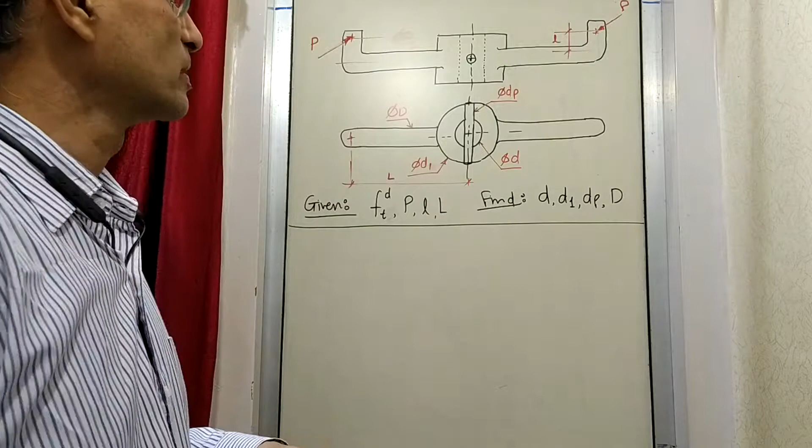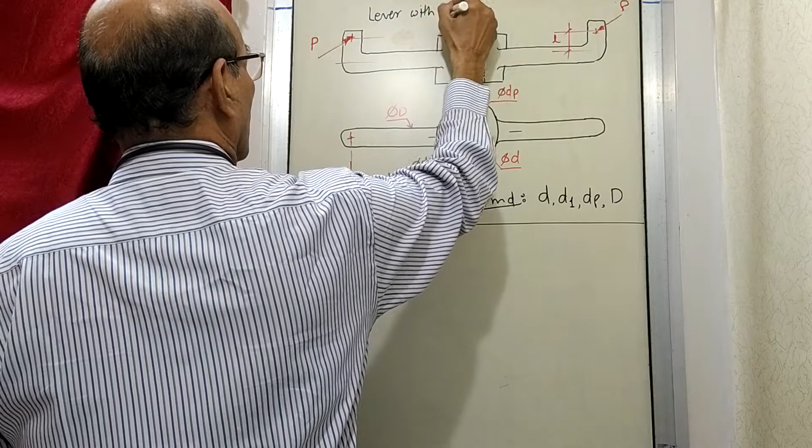Okay, so this is the exercise, this is a kind of lever having combined stresses. Maybe I'll add here: lever with combined bending and torsion. So the combination here is bending and torsion.

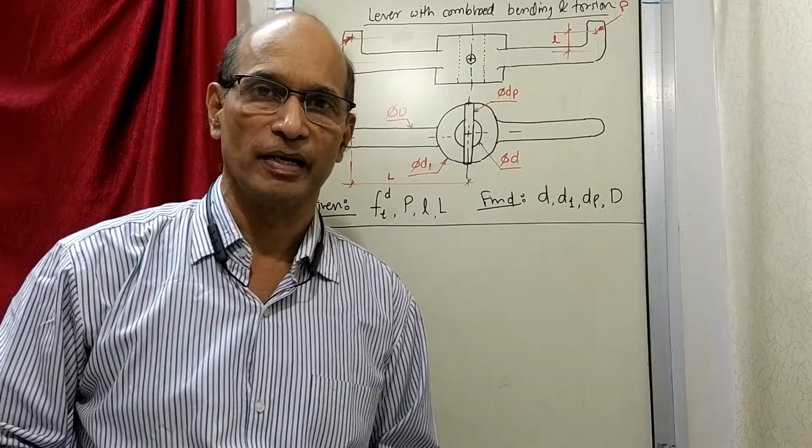Now let us first see how this drawing is made. There is a lever like this, one view like this, the other view is like this. And here what you see is, maybe I'll draw it slightly different here, just to be more accurate.

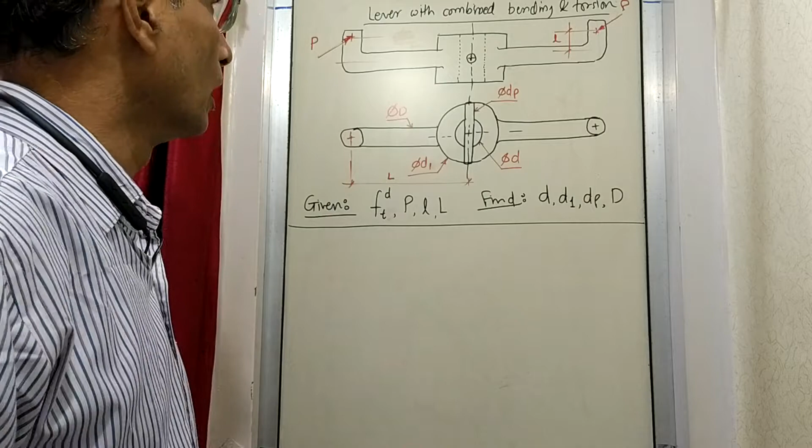Now what is done here is, the load that is applied is in such a way that if you see here, maybe I'll show it again like this, the same load here in the other view.

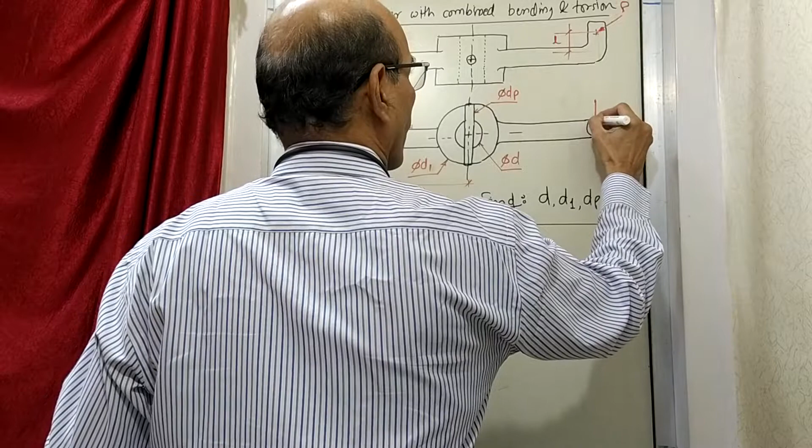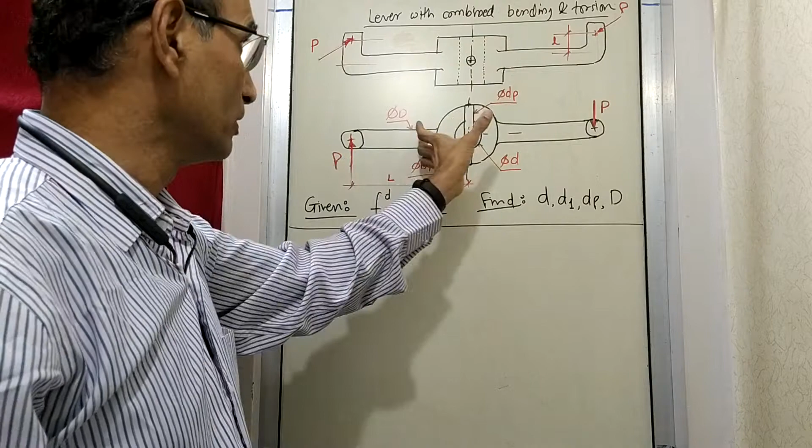So what it means is, this P is applied like this, and as a result we are going to rotate this handle, and maybe it is rotating something else. As you can see, there is a shaft here, there is a hole here basically. In this hole there will be a shaft, connected to this handle with the help of this particular pin, so that when the handle rotates, the shaft rotates, and the machine rotates.

Now the force that is applied, as you can see here, is not shown as an angle, it is shown in an effort to display it in 3 dimensions. So it is shown that it is at some angle. If I want to show it like this, then this is a lever. Here there is a boss, then these are the extensions, and the load applied is like this and like this, so that together it is causing the lever to rotate like this.

Now what happens is, the place where the load is applied, it is at a certain distance like this also, which is capital L, and it is at a certain distance like this also, which is small l. So that distance here is small l, at which this is applied. So it is like a load which is shown in 3 dimensions.

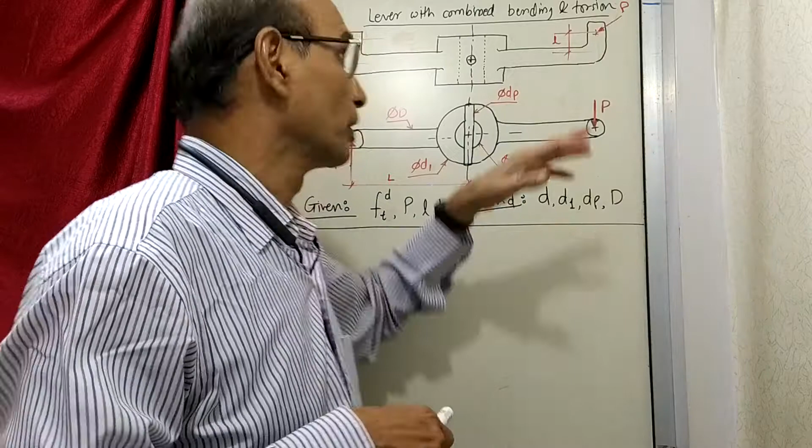Suppose the load is applied here, then it is a simpler case, you can see. If the load is applied here, then on this particular bar, which has a circular cross section, this rod will be under the action of force at a distance L. So P into L will be just the moment that is acting on this.

In other words, when there is a boss here, and you are applying a load like this, P, and this is capital L, so P into capital L, and maybe another P here into capital L, so P into capital L twice. That is the moment applied like this, if that is the case.

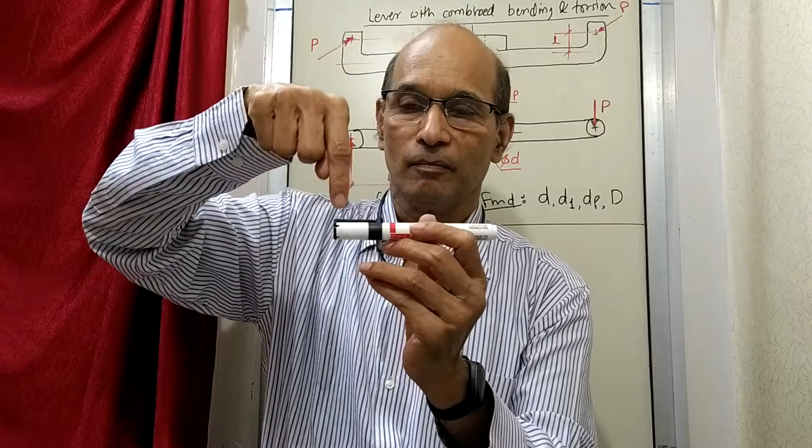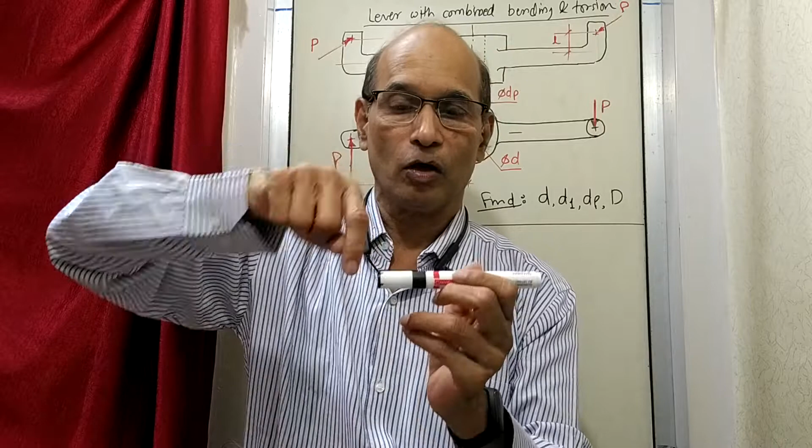Now what is happening, the same thing is there, but it is not in the plane of the lever, it is offset by small l. Because of this, P into capital L will still be there, but because of this small l, it will cause the rod to twist like this. So this particular rod is experiencing bending, and it is also experiencing a twist.

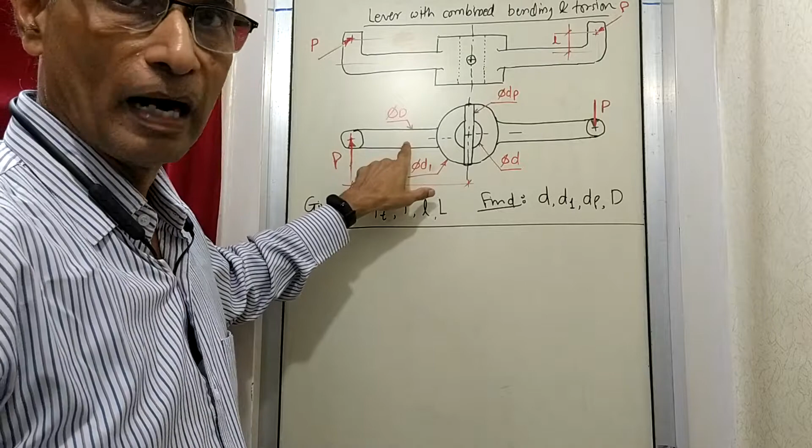So if I show it, it can be shown something like this. I am showing this as a torque that is applied on the handle, and at the same time it is applying a moment like this again on the handle.

So I'll write here: lever handle, it is called as. This handle has moment and torque. It has got moment also, and it has got torque also.

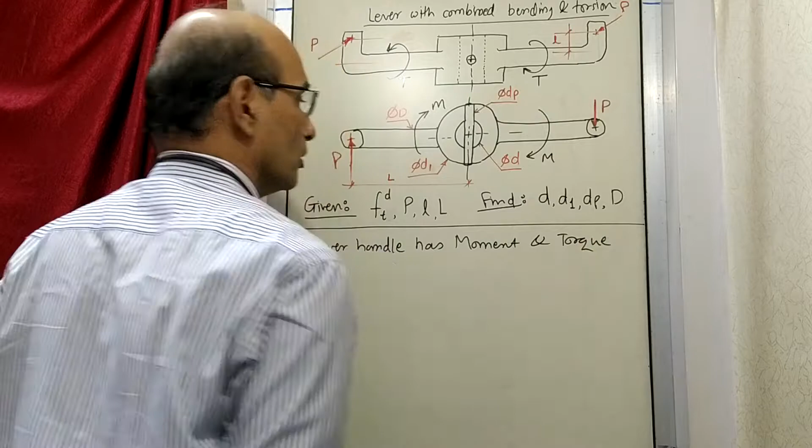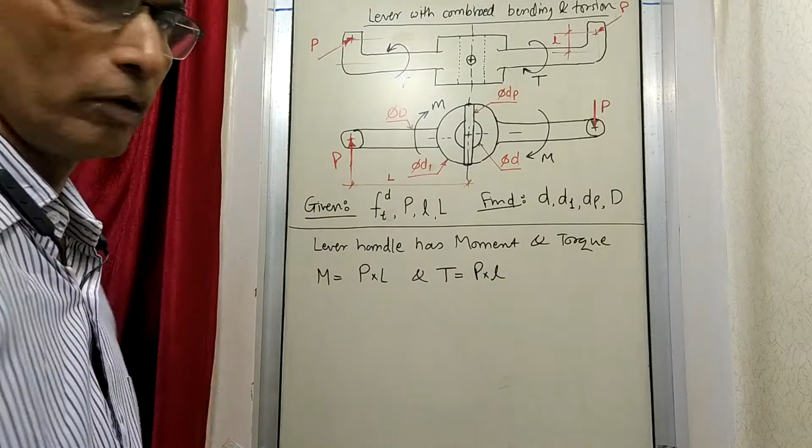So moment M that is applied is equal to P into capital L. P into capital L will cause the moment, and torque will be given by P into small l. Torque will be given by P into small l.

Now, how this is like this, maybe if I still want to make it more clear. Now here this rod is there.

So this is how the handle is, and we are applying that load as shown. At this point it is from below like this. So this distance is small l, and this distance is capital L.

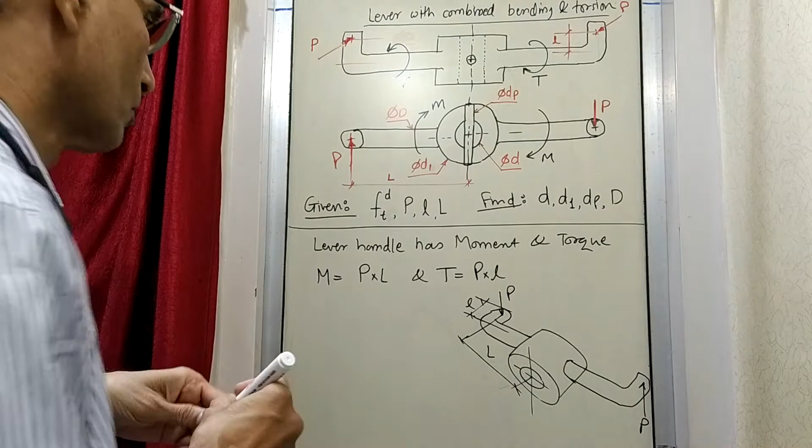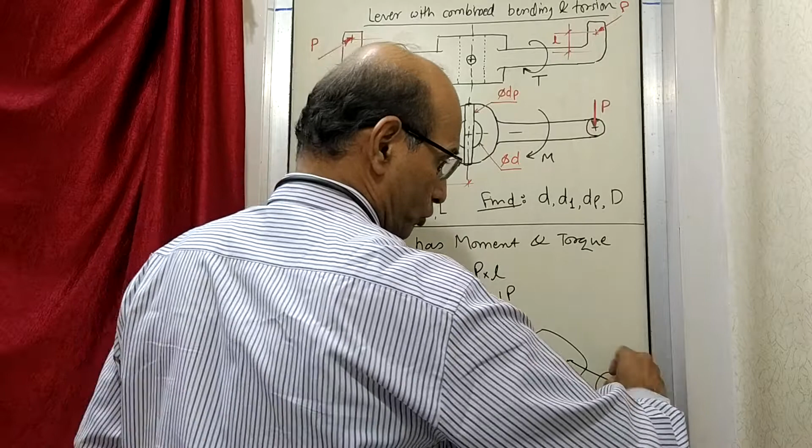So now if you see what happens, this P into L will cause a moment. I may have shown the direction opposite. So P into capital L will cause one kind of moment, and P into small l is going to twist it. So what I'm trying to show you is this kind of torque applied because of this small l. It is causing the rod to twist like this. So there is a twisting also, there is a torque, and there is a bending also because of this distance.

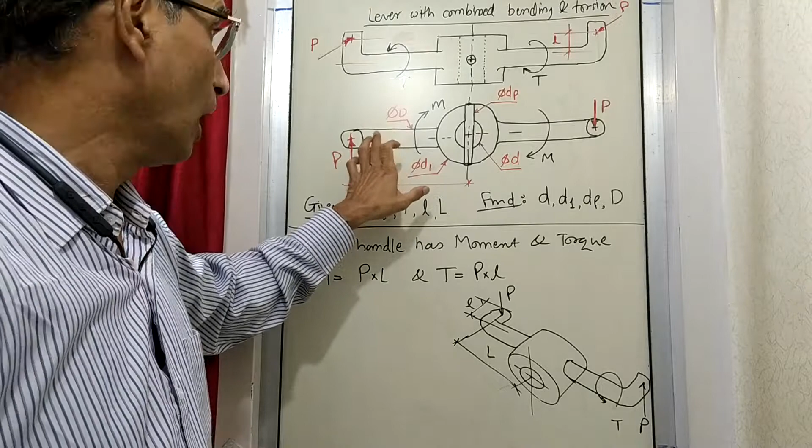That is what is written here. So the shaft, this particular arm, the lever, is experiencing M and T. Now with this, what are we going to do? First, let us try to find out the diameter d of the shaft here. For this diameter, the effect will be only of moment.

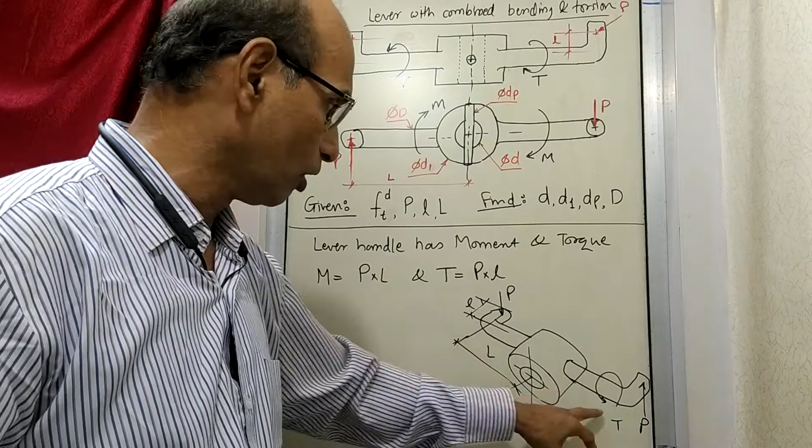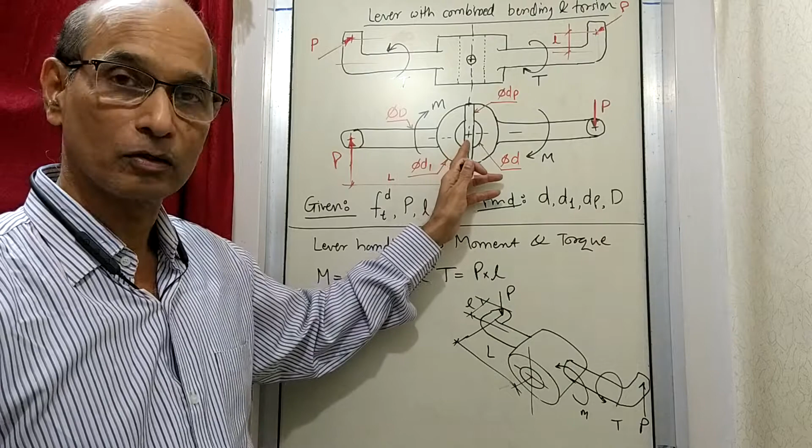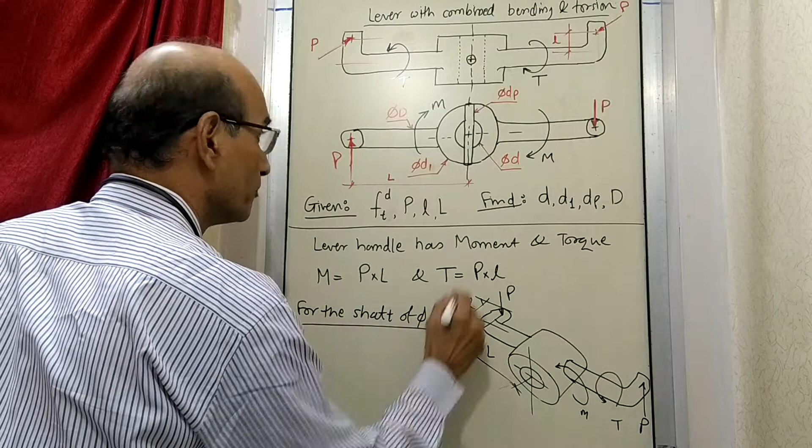So if I show the moment, this is the moment. The moment is the one causing the action of twisting here to the shaft. Now, whatever terms we use, I'll write here again. For the shaft of diameter d, here torque is acting.

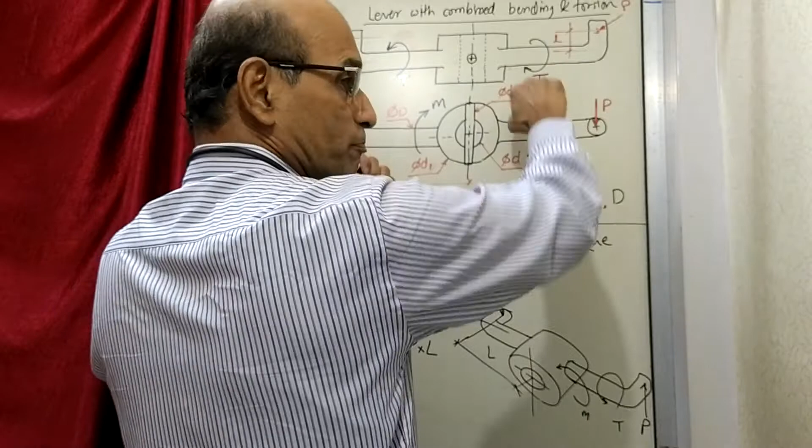Now whatever is the torque acting on this, for the lever it is a moment. So P into L is moment for the lever, but that same P into capital L becomes a torque for the shaft. So I'll write here, it will be torque, given by 2 times P into L, because this P into L is one, and there is one more force acting at the same distance L. So P into L and P into L together, this torque is applied on the shaft and the shaft is getting twisted. So the torque applied on the shaft is 2 times P into L.

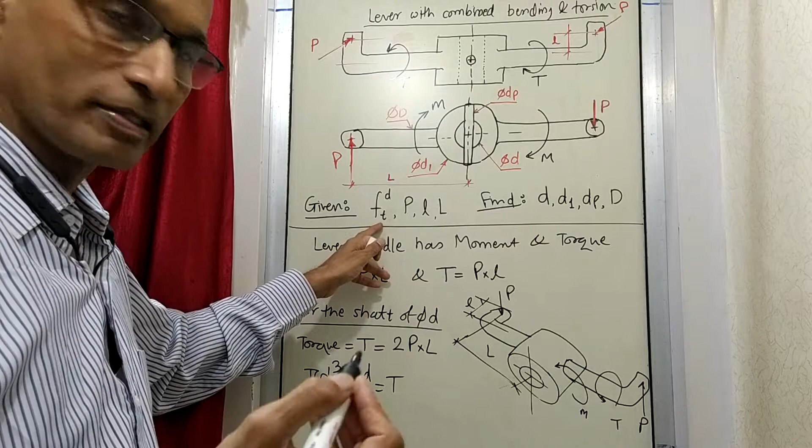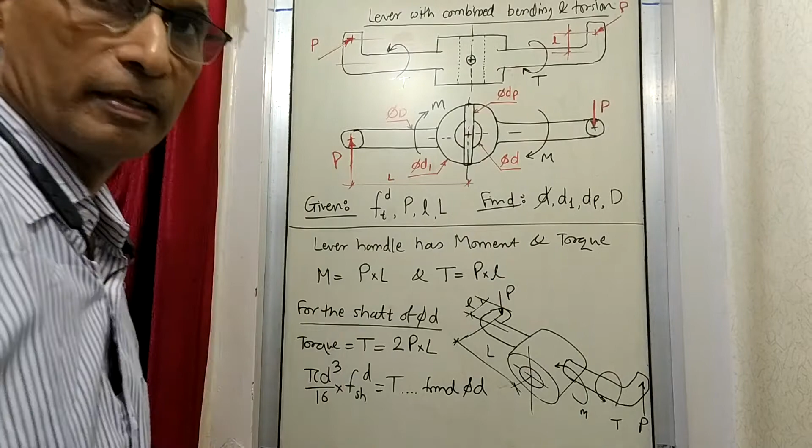Now with this torque, if you find out the shear stress: pi d cube by 16 into shear stress design is equal to torque. This is the design equation we have used many times. So with this design equation, torque is there, shear stress design you can get from tensile stress times 0.6, and then pi d cube by 16. This will give you the diameter d that we want. So this d you can obtain like this. Diameter of the shaft is obtained like this.

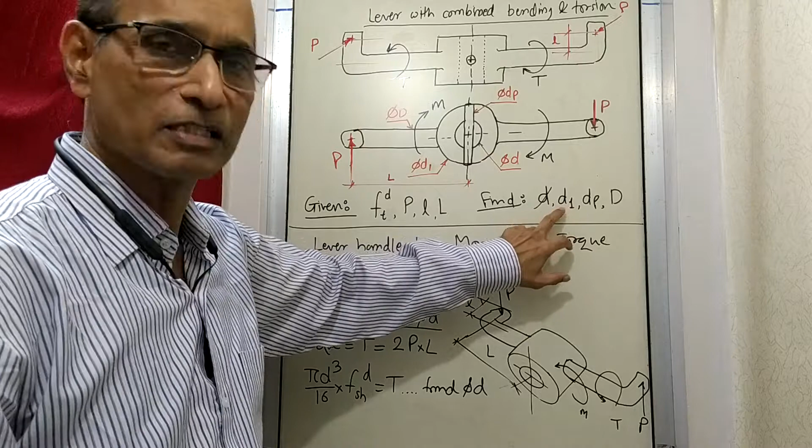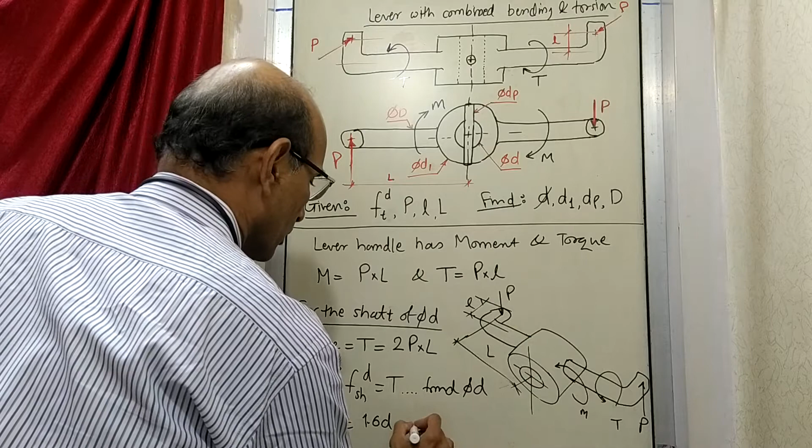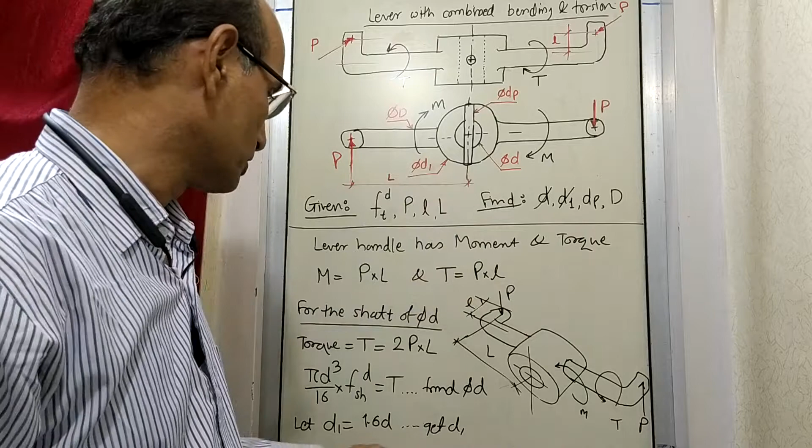Now how do we get the diameter, let's find out D1. Now D1 is just a matter of proportion. So I'll make it, let D1 be equal to maybe 1.6 times D. So you'll get D1 also. D1 is not so critical, just a size something higher, that is sufficient for us, and we are not going to check it also. This empirical relation will work, and there is no reason to check it because it is anyway safe. This is not causing any great failure. So D1 we will just assume and leave it like this.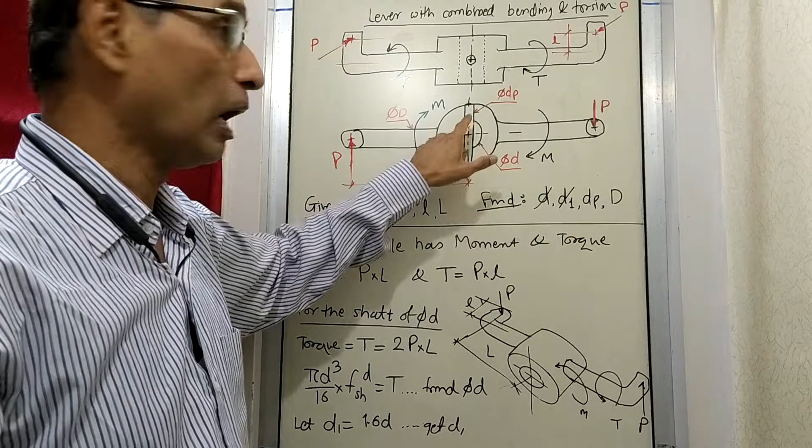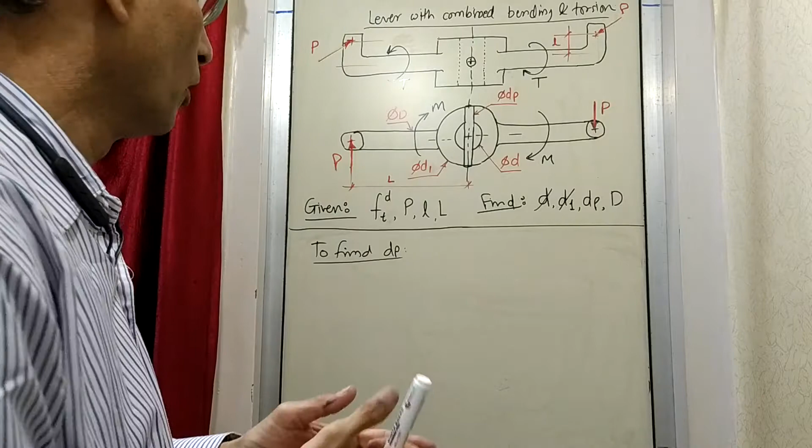And now we'll go to the next size, that is DP, the diameter of the pin. How are we going to design this? So to find diameter of pin, let's see how do we find out the diameter of pin. For finding out the diameter of pin, let us find out the importance of this particular size: what way it will fail, what it is holding, which kind of stresses it is holding. So how do we do this?

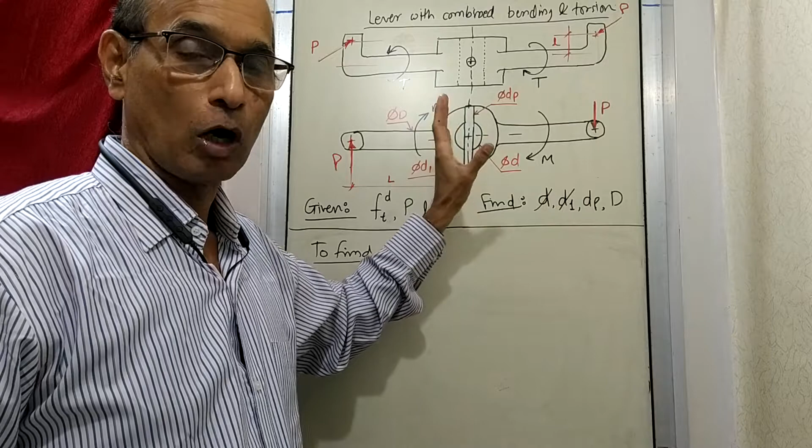Imagine that it is very very thin, so that you will come to know how it will break. You will realize that this pin, if it is thin, if it is not strong enough, and when you apply a torque like this, what will happen is from this place here, it will break into 3 pieces. So at two places it will break and three pieces will be formed if it breaks from here. So this is the resisting area which is resisting this from happening.

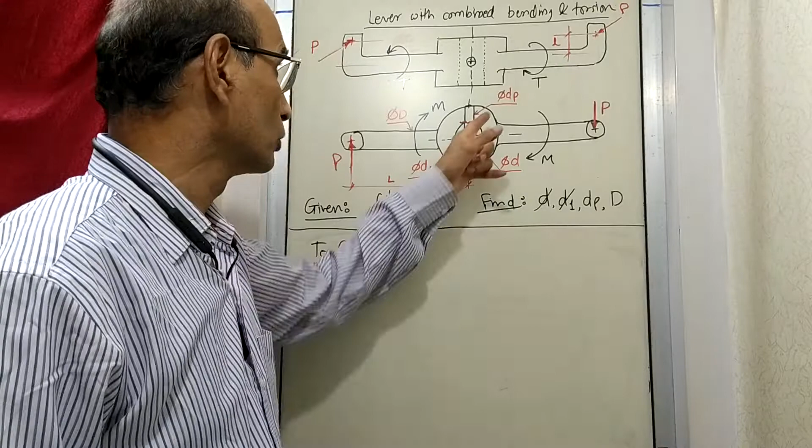So now we have to form a proper design equation so that we will be able to find out dP. Now let's see how that is done. One thing is, if it is to fail, then at this place, let's say suppose I draw like this. This is the pin, it is failing from these two places, and this is the diameter dP which we want to find out.

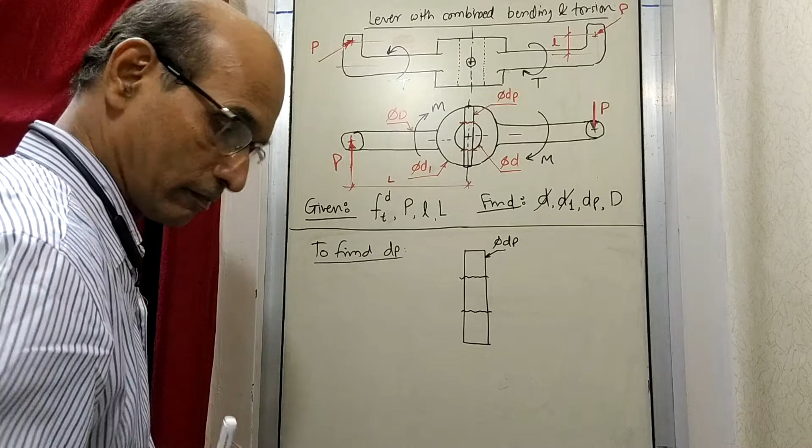Now here at this place, if it is to fail, say it is rotating like this, that means it is resisting some kind of force applied here which resists this torque. So when you do like this, it will cause opposite torque, meaning some force is applied here. Or maybe you can do it the other way: you can say that this is the force that you are applying while rotating this shaft. So this is the force that is applied. So suppose I call this F. F is the force that is applied.

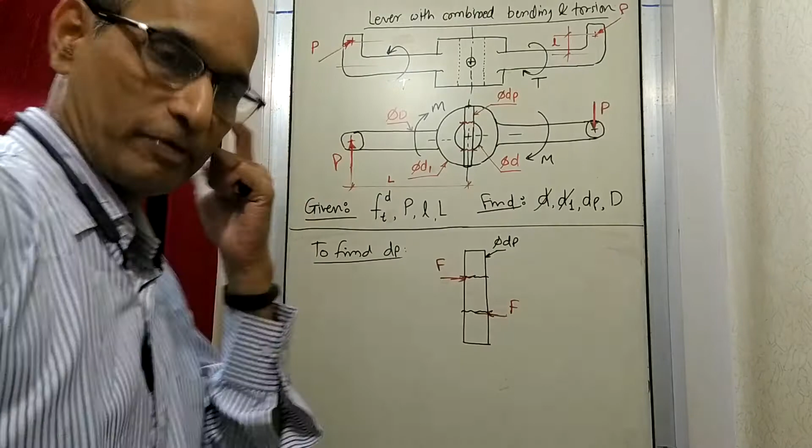Now what happens? What is this F going to be? So you can write F is equal to the tangential force, the force acting along the surface. This force is equal to stress into area, as usual.

So stress is shear stress, which we take as design stress, and area is the area of this cross section. So pi dP square by 4 into shear stress is going to be the force acting here.

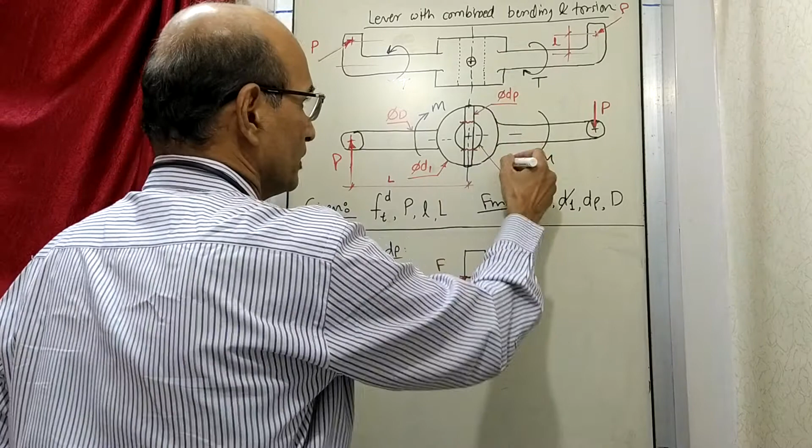Now this force is acting at a certain distance, that is d by 2. You can see this is the center line, then this is d by 2.

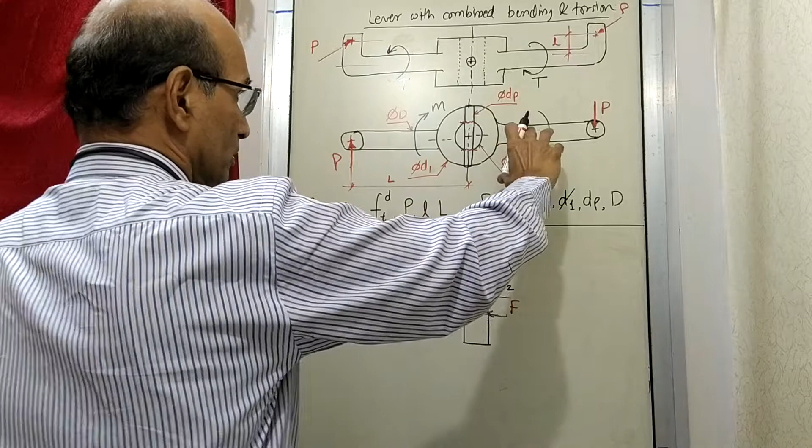So what will happen is this is going to create a moment, this is going to create an opposite torque than what you applied. So what you are applying is here, and what this is resisting is because of this. Now let's see how we do it.

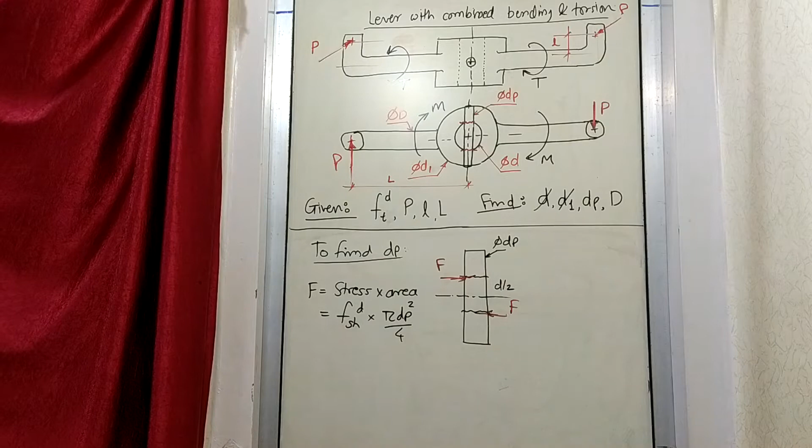So this F acting at a distance of d by 2, I'll write F into d by 2, and then there's one more F here into d by 2, that means this is taken 2 times. It has come from what you have applied.

So this is equal to 2 times P into L. What you have applied, this is P into L, P into L.

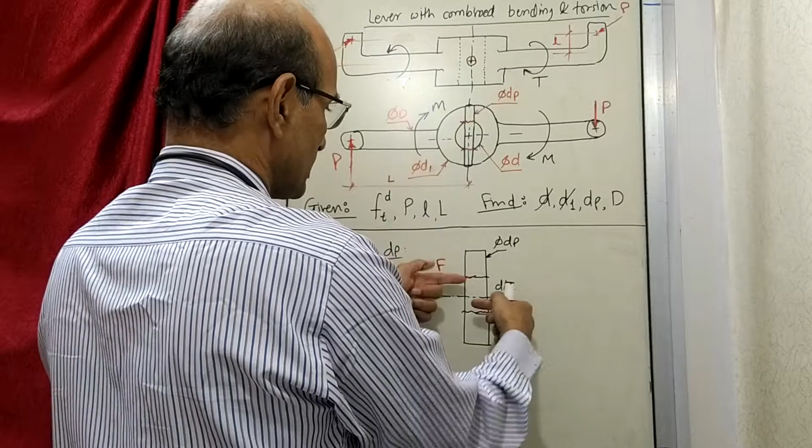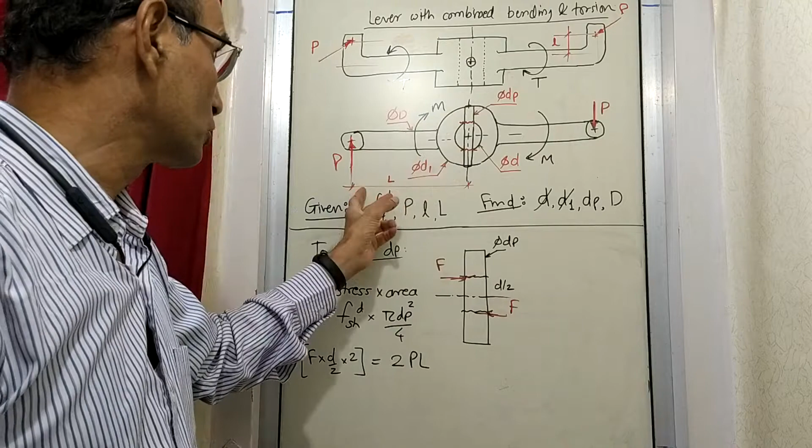So that 2 times P into L has resulted in a force acting like this at this place, such that this force at this distance and this force at this distance together cause a torque which matches this torque. So this torque for the pin becomes this torque at this distance.

So we have written an equation like this, which is going to be a design equation for us. I'll write this down again: therefore 2PL is equal to, now what is F?

F is this whole thing. So F shear design into pi d square by 4, this is F, then multiply by d by 2 into 2, because it is twice.

So now if you solve this, this is the design equation that is formed. If you solve this design equation, you will find everything is there except dP, which you can find out.

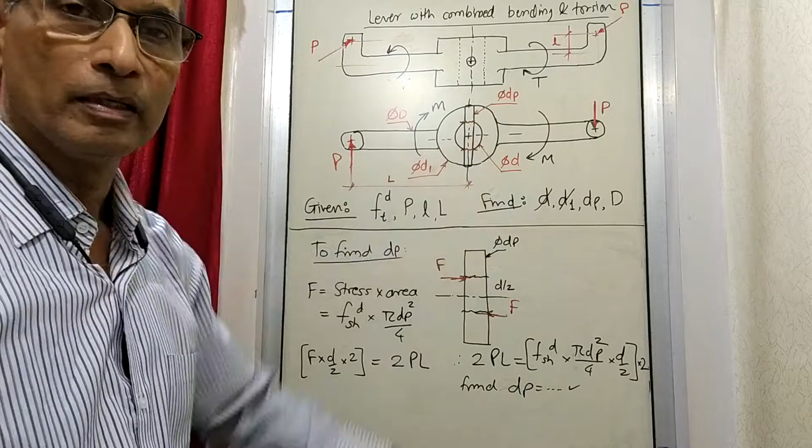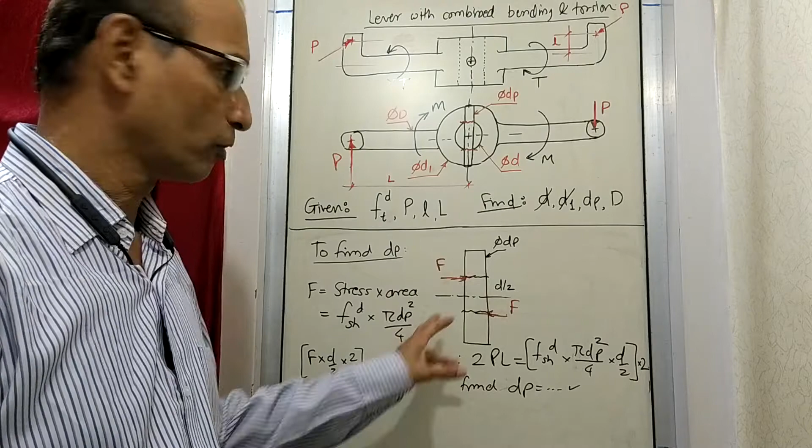So with that dP, if you provide a pin of that size, it will not break from here, because this is designed considering whatever is required. So from here the breakage might take place, which we have taken care of, because this is the resisting force at this area causing a torque.

This torque is equal to what torque you have applied. By this we have formed the equation. Now having done up to this much, the next thing is to find out the diameter of this arm, capital D. How do we find out diameter D?

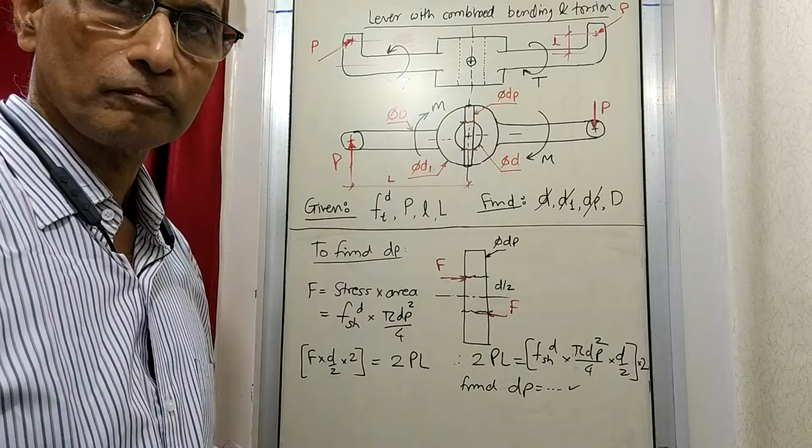For that you have to find out what this diameter is experiencing. Now this diameter, earlier one figure was drawn here. According to that figure, this diameter is experiencing moment as well as torque. So this is what is called the combined case, where it is bending and torsion.

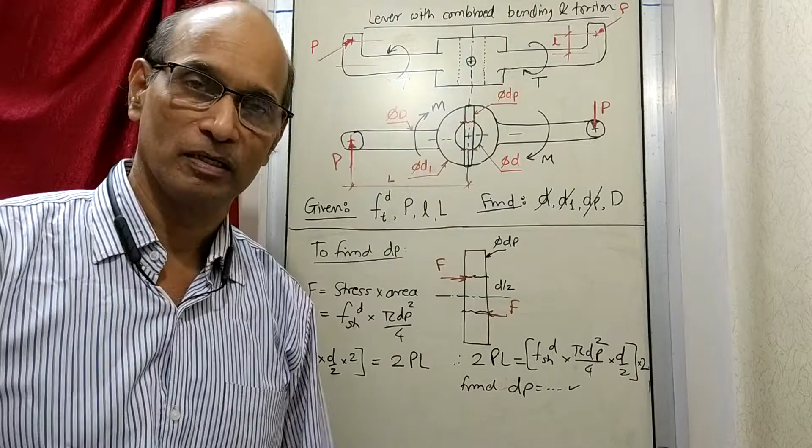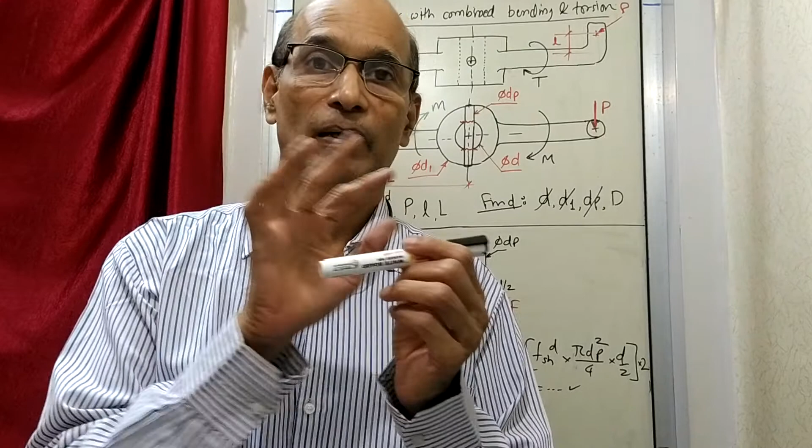As you have seen earlier, whenever the same section is experiencing bending and torque, these two parameters cannot be added straight away by mathematical addition. They are to be combined by the square root equation. So now what we do is, I'll write here: design of diameter.

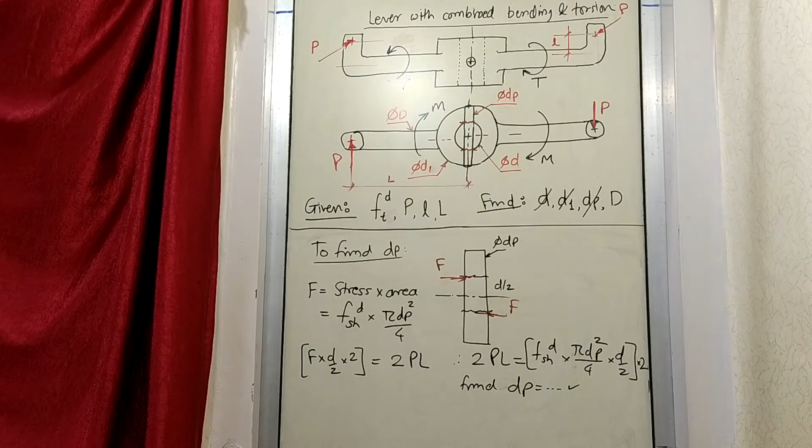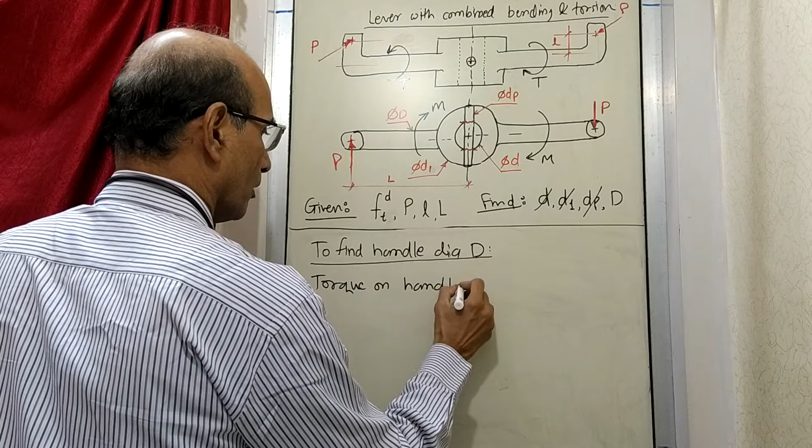Now let's try to find out diameter D. So torque on handle is equal to P into small l, and moment is equal to P into capital L.

So now when these two things are there, as we have seen last time, we are supposed to combine them and find out the equivalent torque and equivalent moment.

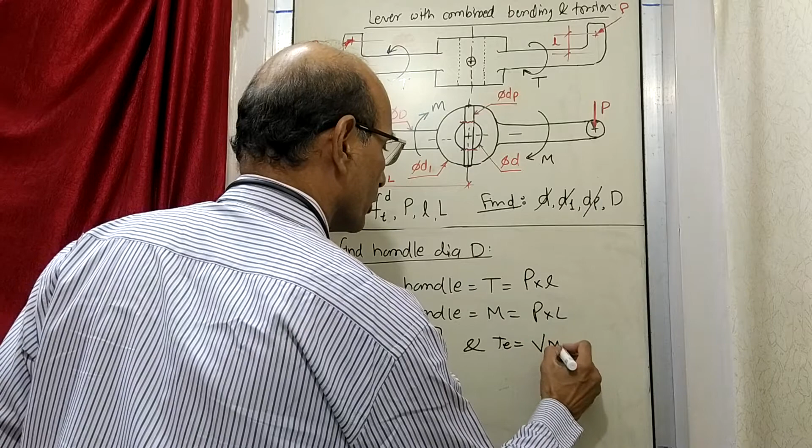So you will find that M equivalent is equal to half of M plus square root of M square plus T square, and T equivalent is equal to square root of M square plus T square. This we have already seen.

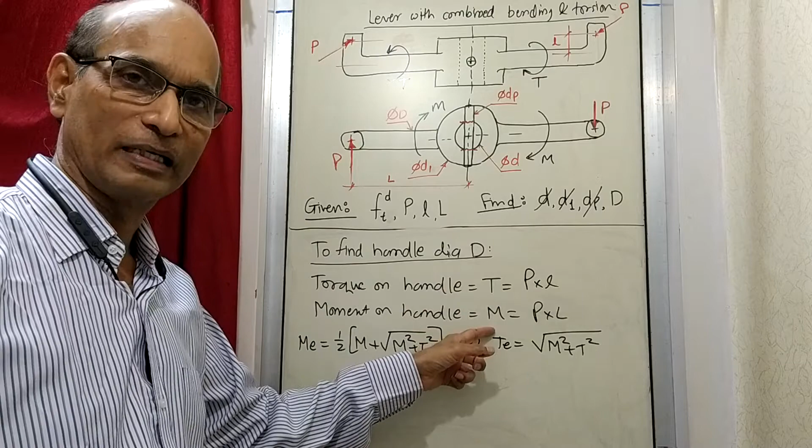So you can combine these two like this, and then instead of saying moment and torque are acting separately, you can say only moment is acting, which is equivalent to both, obtained by this combination. Similarly, this is the equivalent torque obtained by this combination.

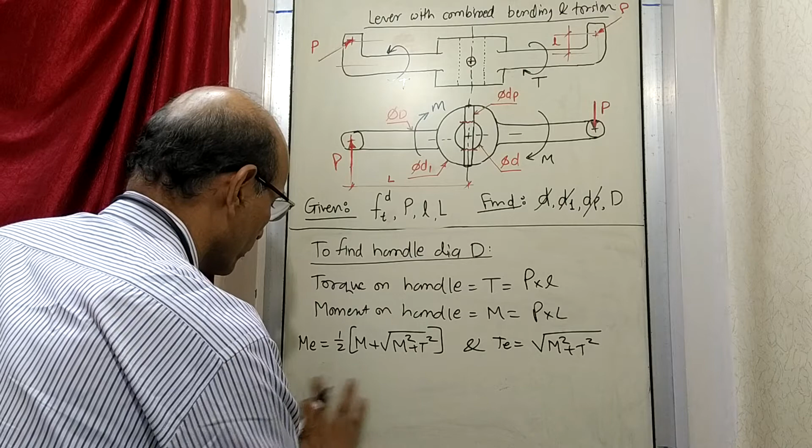Once we do this, we can equate this moment with the design equation, saying Ft design: pi capital D cube by 32 into Ft design is equal to M equivalent. This will give you one value of D.

Similarly, pi D cube by 16 into F shear design is equal to torque. This is another design equation.

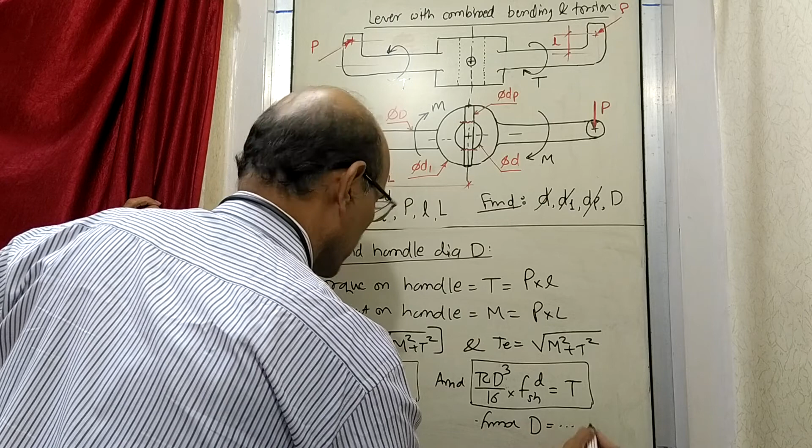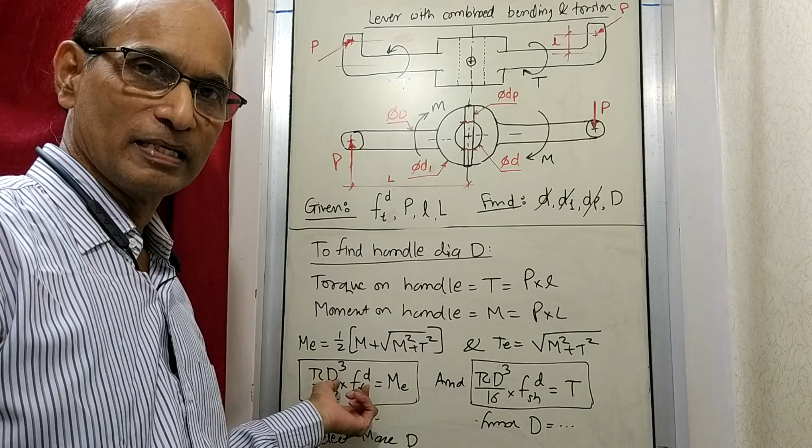This will give you another value of D, and I will say select maximum D out of the two. So you have obtained the diameter capital D, once by moment consideration, and the other way by torque consideration, which is T equivalent.